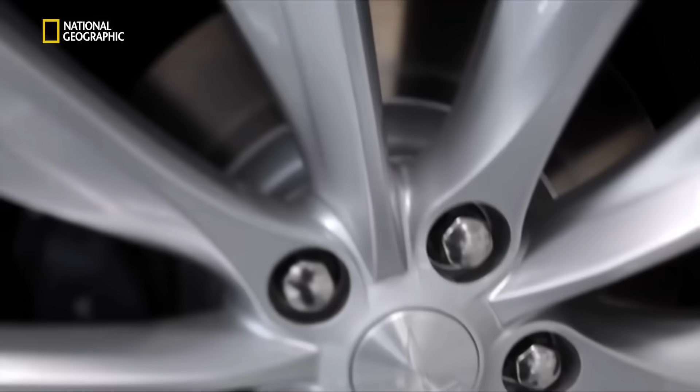Aluminium bodywork, 19-inch alloys, and a $50,000 price tag. At first glance, this car is the latest in a long line of high-end sedans. But that is where the similarities end.

The Model S is a totally different type of car. Tesla believe it can lead a revolution and change the face of motoring forever. It's the first ever mass-made premium sedan powered purely by electricity, designed to have speed and range, and not a drop of gas. Our goal is to create an electric car that is the best car in the world and show that that's what an electric car can be.

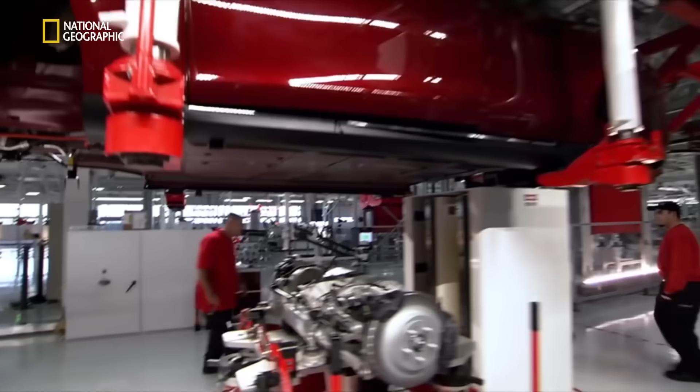Tesla's goal is to kill off the combustion engine and prove the electric car has finally come of age. Driving a gasoline car is going to feel like yesterday. Driving this car is driving the future.

This is Elon Musk, Tesla's co-founder and CEO. Elon is an inventor and a maverick entrepreneur, one of America's youngest billionaires. I like exploring, I like technology, I like creating things that have never been seen before or even imagined before.

He is a genuine Silicon Valley success story. In the mid-1990s, Elon set up a small internet company. By 2002, he'd sold PayPal for $1.5 billion. Next, he founded private rocket company SpaceX.

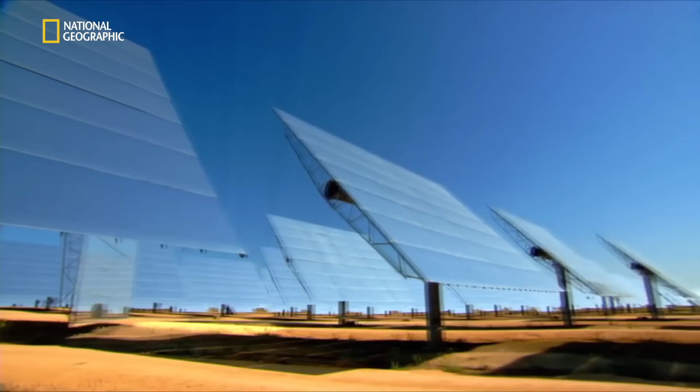It's all part of Elon's life mission. When I was in college, I tried to think about, well, what are the areas that would most affect the future of humanity? So the three things were the internet, making life multiplanetary, and the third being sustainable energy. So that's what really ties together my companies, is that sort of thought from 20 years ago.

Tesla Motors is Elon's sustainable energy brainchild. Named after electric power pioneer Nikola Tesla, it's a car company that only makes totally electric vehicles. No hybrid and no alternative fuels. Absolutely no tailpipe. The company estimates their electric cars cause 50% less CO2, even if much of the electricity comes from a coal-powered plant.

It's technology Elon and co-founder J.B. Straubel believe we need. We're solving problems for our children, our grandchildren. Oil is a finite resource, and eventually we have to find alternatives. When you take that oil out of the ground and you burn it, it's extremely dangerous. We should not play Russian roulette with the atmosphere.

We only got one. Tesla's founders have a vision of a world without gasoline cars. They are convinced electric is not only cleaner, but better. Now, they want to prove it to the world.

They believe their cars can trigger a transport revolution and bring electric motoring to the masses. What we're doing here at Tesla can have an amazing impact and revolutionize the auto industry and make every car on the road electric. That's our end goal.

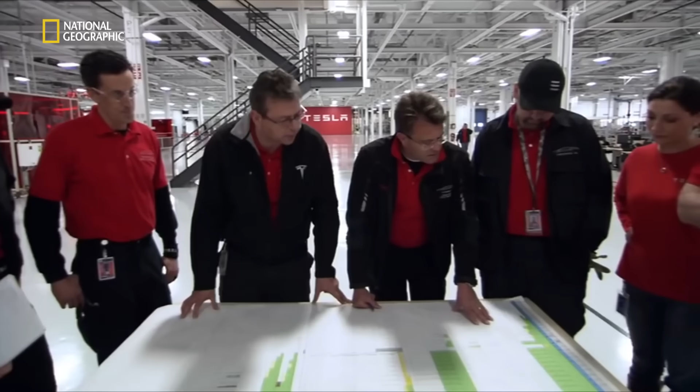Elon brings in Gilbert Passin as head of manufacturing. Gilbert is an expert from one of Toyota's award-winning plants in Canada. His description of my job to me was very simple: you've got to create the best factory in the world with the best people in the world and make the best premium car sedan. And I said, okay, so where's the factory? Well, you have to find one. Where's the team? Well, you have to make one.

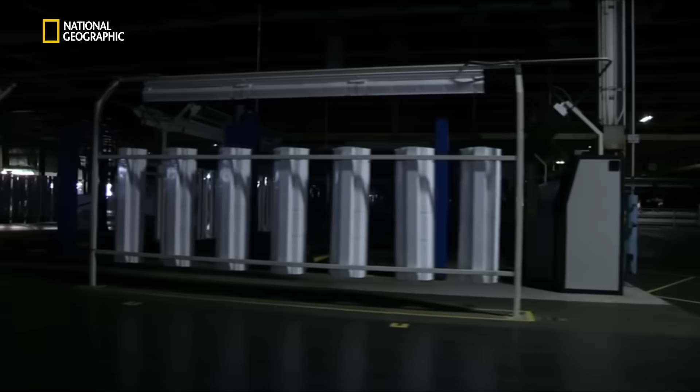The company purchased a former GM and Toyota site in Fremont, California, on the edge of Silicon Valley. The abandoned facility is a traditional car factory: dark, little natural light, bare concrete floors. When Tesla Motors move in, it's the birth of a megafactory like no other. It's a totally fresh approach to car manufacture.

The walls and floors are painted white, the machinery a striking red. Skylights and windows flood the factory with sunlight. If you make the factory pristine and clean, that sets the tone for the vehicle. We want that same sense of quality and precision in the car itself.

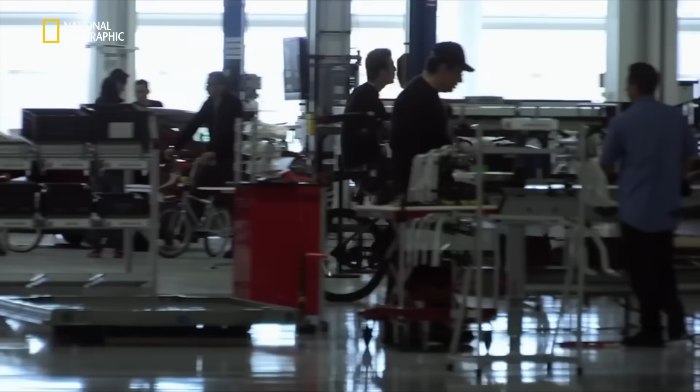As part of the whole company ethos, bikes are provided so the workers can get around the factory. I think it's important to have an environment where people look forward to coming to work, so it's worth putting some effort into making the factory beautiful.

In true Silicon Valley style, they fill the space with the most advanced technology, creating an automated production line capable of building tens of thousands of cars—super efficient multitasking robots, self-guided smart carts, and computerized production schedulers.

The factory is designed to be up there with the very best in the world. We love engineering, we love beautiful machines, we love new technology. We love to innovate with high technology, and also in manufacturing, we love to do that.

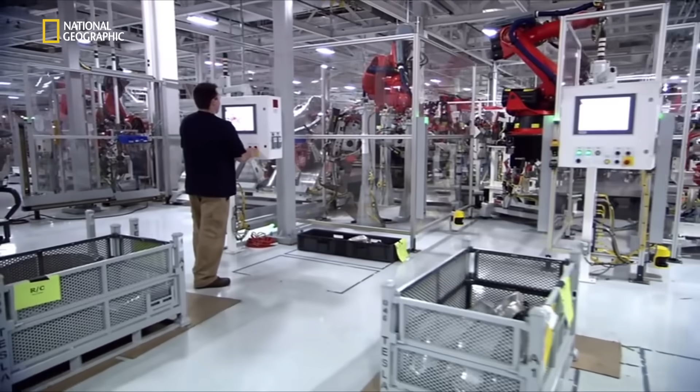Without training, these sophisticated robots are useless. They all need to be taught before they can run tasks automatically. Every robot is programmed by hand. The Tesla team has meticulously trained 130 sophisticated robots over a year and a half.

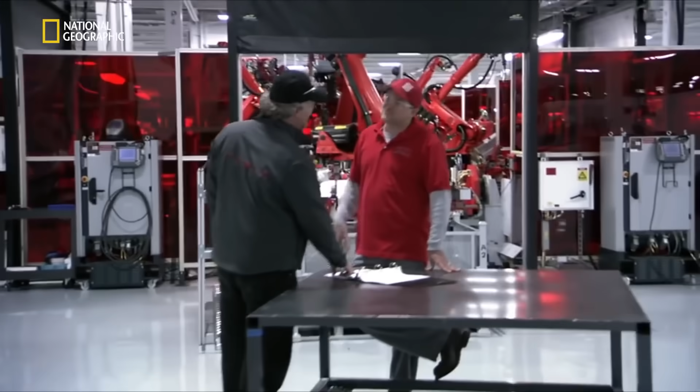One of the last robots still to be programmed is a MIG welding robot. It will be used to join the car's underbody. These are pretty busy robots, so we got to make sure that our takt time is good.

A robot's work is only as good as the man who trains it. Brad Johnson is a welder with over 25 years' experience at the highest level. Getting this done today, we'll have the teachings all nice and smooth, and then we can start running 100% full automatic. That sounds good.

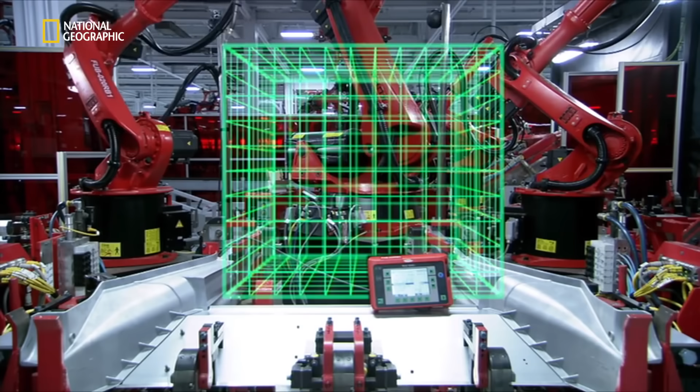The space in which the robot operates is treated as a three-dimensional grid. The head can be manually guided to any point using a teach pendant. There's our start point and our weld position.

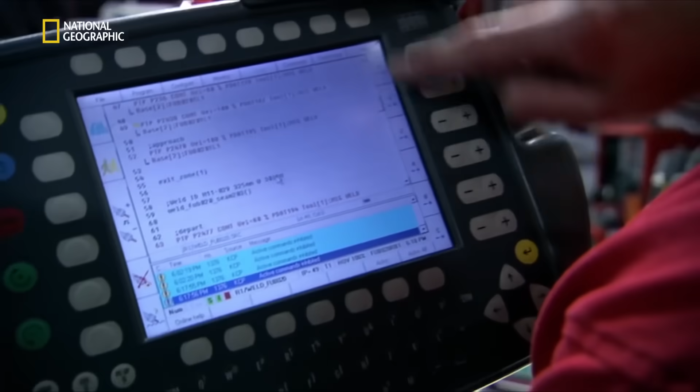Brad guides the robot millimeter by millimeter and uploads the coordinates. The robot works out the most efficient route and runs the program.

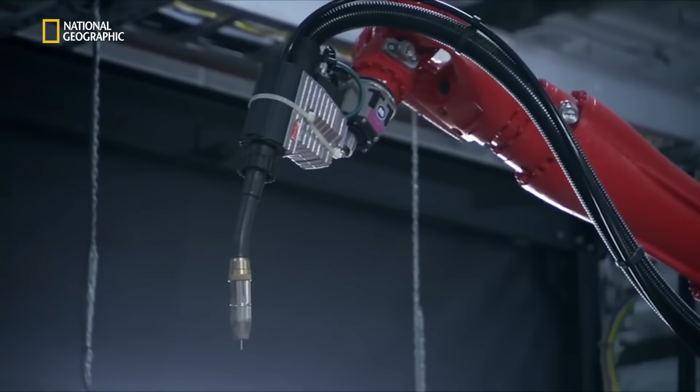Looks like the teaching is right on mark, and we have a really good quality weld right here, so we should be able to run full auto with this weld. When full production begins, Brad's handiwork will be exactly replicated by the robot 100 times a day.

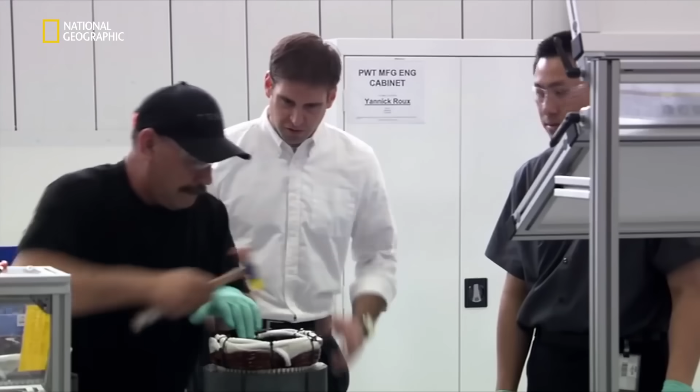Since their inception in 2003, Tesla Motors have been pursuing their electric car revolution with a step-by-step strategy. In an unconventional business move, Elon decreed that Tesla must invest in their reputation first and worry about profit later.

Stage 1: make a small number of high-value cars that prove electric power can be desirable. The Tesla master plan is very simple—we start off creating an expensive, low-volume car to help break the mold in electric vehicles.

Plan in place, they set to work on their first car, basing it around the British-built Lotus Elise. Five years later, they released the Tesla Roadster. Quicker off the blocks than an Aston Martin Vantage, the electric sports car astonishes the motoring world. Step 1 complete in the Tesla strategy.

What we showed was that an electric car could be sexy, it could be fast, and it could be long range, and that if you produce such a car, people would buy it. But as a $100,000 two-seat sports car, it's a luxury second vehicle to most of its owners.

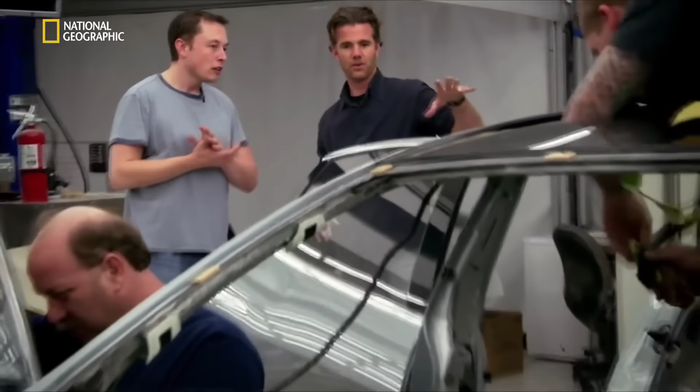Time for the pivotal Stage 2 in the master plan: a car that costs half as much and sells in much bigger numbers. A very important step in the Tesla strategy is really going to show that a mainstream electric car can be better than a gasoline car.

The Model S is the second step in Elon Musk's vision of an electric revolution—a premium mass-market sedan designed and built from the ground up by Tesla.

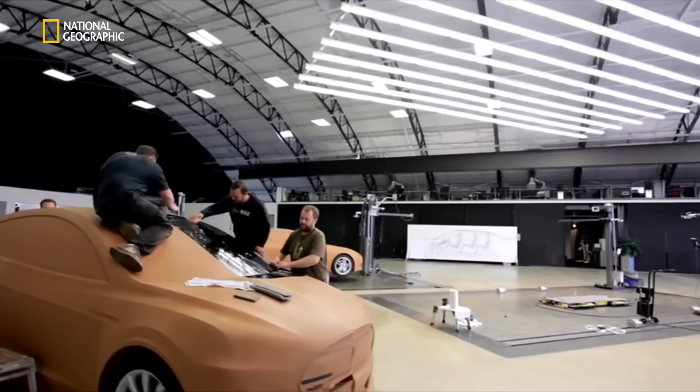At the studio in Los Angeles, they are working to craft that car. The Model S is really the foundation of Tesla. It's the first true product designed, engineered, built, manufactured by Tesla, and it's really the beginning of what our mission is about.

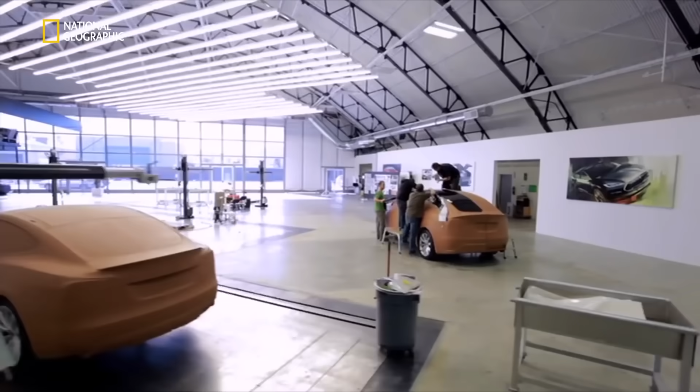Franz von Holzhausen is the chief designer. He believes Tesla's design needs to have some conventional appeal. It's really easy to have a clean slate and go pretty crazy with that. We had to start with something that people could relate to—if they even knew or cared that it was an electric vehicle, they were attracted to it.

We've stretched the sedan and made it a little bit more modern, but it's still a sedan. It still has this somewhat traditional cue, so it's easy to love because of that association.

Although uniform in appearance, the Model S is a unique car. It was conceived as electric. Even the shape is designed to maximize the battery's range. The body and the waist are all slim, so there's no excess fat or body mass on this car, and that translates into great efficiency.

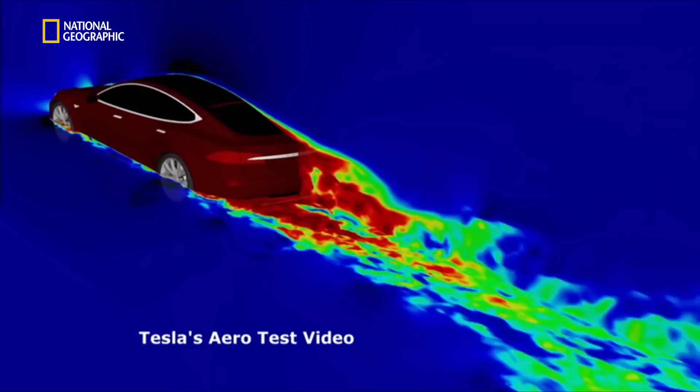This car is one of the most aerodynamic sedans on the market. In an electric car, conserving battery power is so important, the designers put huge efforts into reducing the drag. Even the door handles are aerodynamic, receding flush into the body.

But it's the interior that is most heavily influenced by the electric powertrain. The powertrain is incredibly small. You get the same performance out of a motor that's the size of a watermelon, fitting between the rear wheels, and everything else above that is what I call the opportunity space.

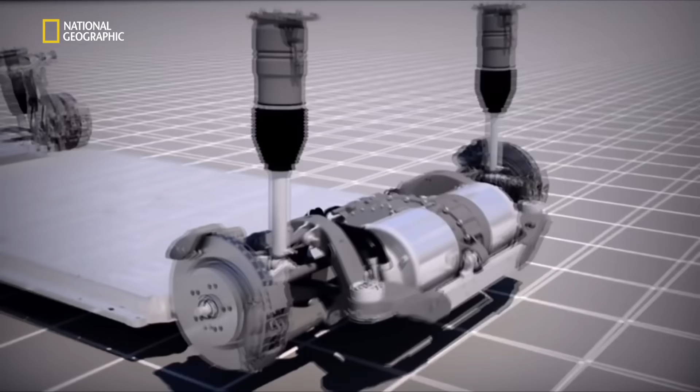The design team started with the motor and flat battery pack and worked upwards. With the motor next to the wheels, there's no need for a drive shaft, so there's no rise under the rear middle seat. There's no fuel tank or transmission. The Model S has free space from the floor upwards.

What you'll see is a vast amount of space. In fact, it's so big that we decided we could fit 7 people, by putting 2 rear-facing child seats in the back here. You can see where they fit, and their legs go right down in there.

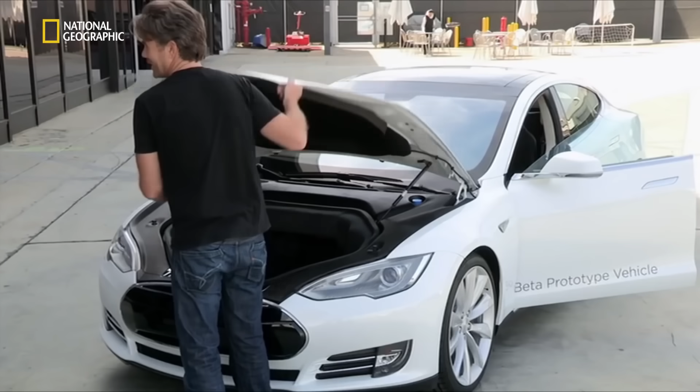So this is what we call the frunk, really the trunk in the front of the car. Arguably, you can put a whole bunch of stuff in here, even when the back of the car is totally loaded up with people and kids and stuff. And who doesn't need one of these?

Tesla promote these unique features at every opportunity. As a new marque, they're trying to make an impact in a marketplace crowded with established big hitters. Just looking at the United States, of the 3 other car companies, the youngest is 90 years old. So clearly this is not an industry that has been supportive of newcomers.

The Geneva Motor Show 2012, another leg in the company's relentless promotional campaign. We're done selling Roadsters in North America, so this is our product. It's our product, Tesla's product, and therefore we need to get it out to start selling.

Industry experts are judging Tesla on the Model S. It's seen as make or break. Maybe Tesla has a bright future. I think the Model S is very decisive to see if there will be a great future or if there won't be a future at all.

The company have taken the risk of collecting prepaid orders on the car. They've amassed nearly 10,000 advance sales. The financial boost also creates real pressure. I get harassed quite a bit actually by some people who have reservations, and it's a lot of expectations, very high expectations that we're going to have to meet and exceed, really.

Some prepaid customers have been waiting up to 3 years for their car. In return, they've been promised a delivery deadline. I do feel an incredibly strong obligation to those that have placed their faith in Tesla and put down deposits. I'll do anything to make sure that their faith is not misplaced.

The delivery deadline for the first cars is now only 2 months away, but the brand new factory hasn't built a production car yet. If the customers are to get their Model S on time, the facility urgently needs to start manufacturing. The speed at which we have to work here is extremely important to the company's bottom line. This is a kind of timing that is really, really challenging on many, many different accounts.

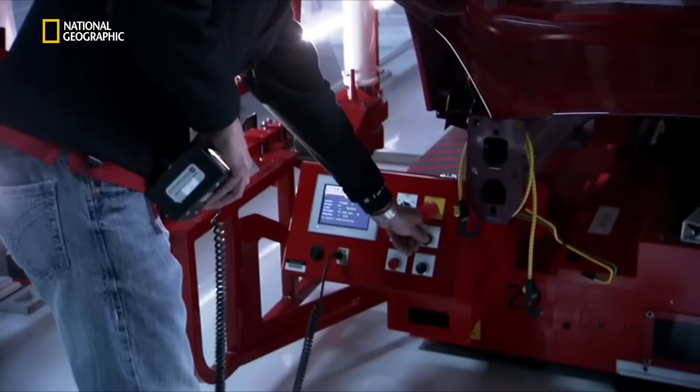Tesla need to build 20,000 cars a year. But before mass production can begin, Gilbert and his team must prove the factory is ready. The company is relying on them to get it right. We have to make sure that car after car, the quality is there, everything is perfect along the way. So we are really gearing up towards a production ramp-up.

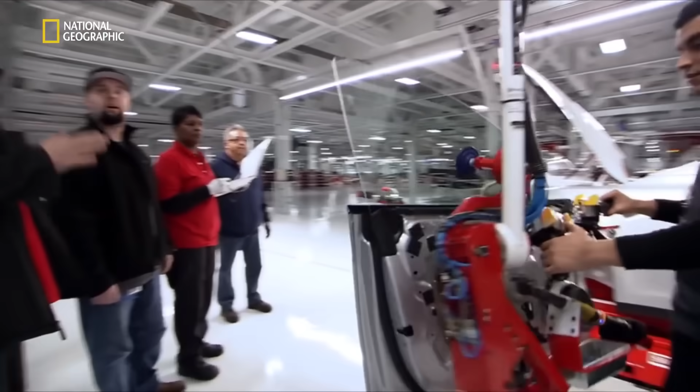Over the next few weeks, the factory will test manufacture a limited number of Model S. If the line doesn't perform with these cars, the company will be forced to miss their deadline. Tesla's electric revolution would be over before it started.

A very, very important moment is the birth of Model S in our Tesla factory, and it's where the rubber is going to meet the road, so to speak. The process begins in stamping. To increase the battery's range, the company have decided to build 97% of the Model S with lightweight aluminium. It's an extremely rare feature in a mass production car due to the cost.

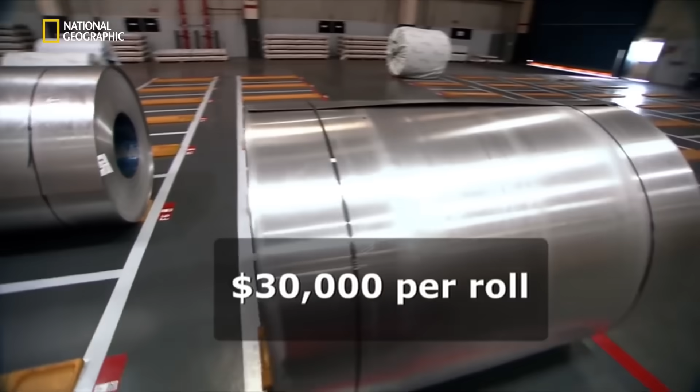Every Model S starts as one of these. The roll is loaded into the mechanical cutting machine.

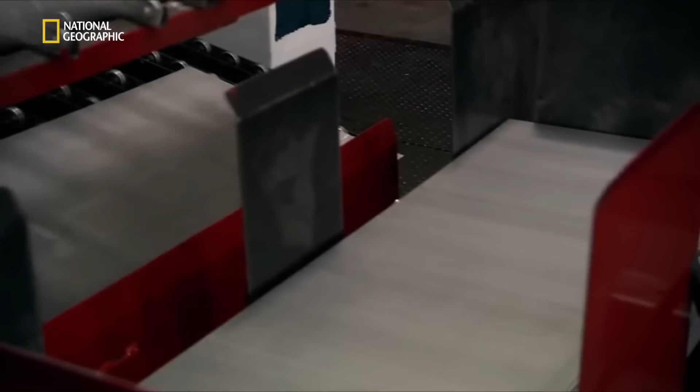Once cut, the panels are passed to the stamping press. We need to translate flat pieces of aluminum into 3D forms. How to do this with aluminum stamping, with the level of quality we expect, is really, really challenging.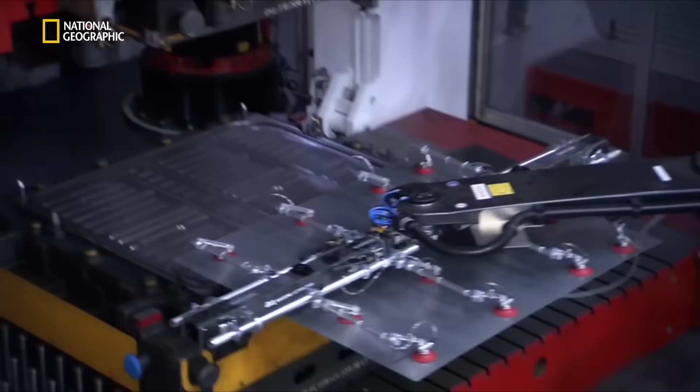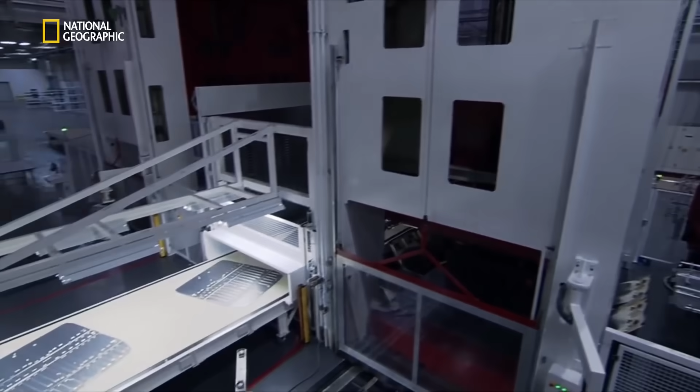Robotic arms feed the 4 stamps. Each stage forces a more detailed 3D shape, producing stacks of floor plates.

These lightweight aluminum parts improve the Model S's power-to-weight ratio, which helps increase the performance and range.

The 2 things that obsess co-founder and technical chief JB Straubel: Any ideas on how we can make it better? Performance and range were the 2 big issues that needed to be improved, and that's where we've put most of our focus on the technology and powertrain.

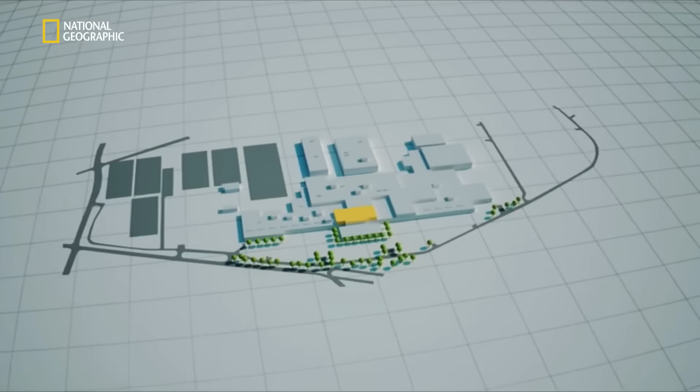Powertrain manufacture, 2nd floor. This is where they build the heart of the Model S, the motors and battery packs. Tesla know the electric powertrain will define their cars, so they push to advance the technology themselves. This is an extremely exciting field where inventions continue to happen even faster than they did in the years previous.

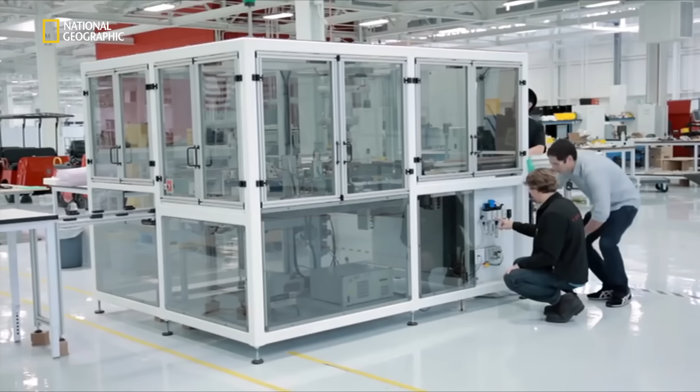Tesla's solution to improving battery life appears startlingly simple. They use thousands of small lithium-ion cells, similar to laptop batteries. Thanks to these regular batteries, the company say the Model S has achieved a top range of 480 kilometers.

Once you have 250 to 300 miles of range, then you're in a different usage mode. You're in a range that is equivalent to most gasoline cars.

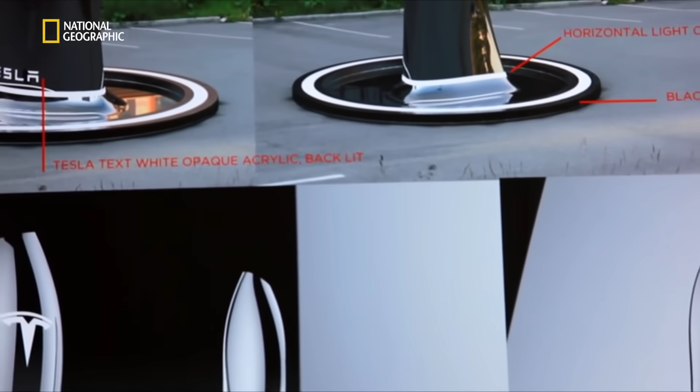The car can be charged by 100 kilometers every hour from a regular power outlet. Ultimately, Tesla are hoping to install superchargers along major highways that can charge the car to capacity in 45 minutes. You can charge the car up every night, but you don't need to. You can actually charge it once a week.

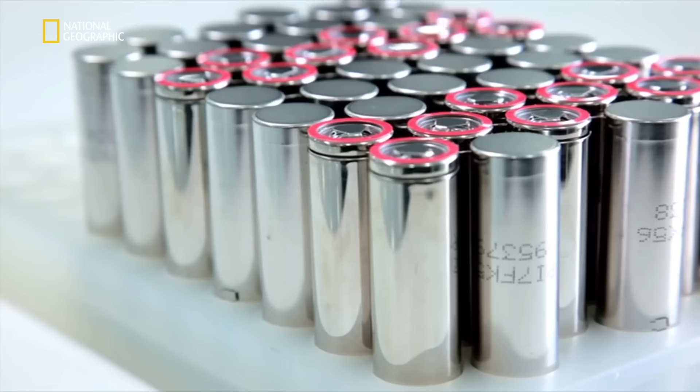The high-performance battery pack is formed with over 7,000 small cells. They're organized into a flat layer with specific groupings of positive and negative. The final layout is the key to the pack's power and range, and Tesla considers it absolutely top secret.

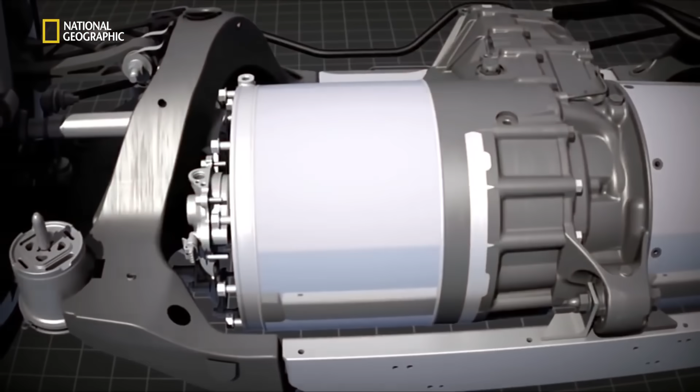The motor unit is also developed in-house. It's essentially an AC induction motor, a concept invented by 19th century scientist and Tesla Motors namesake, Nikola Tesla. He harnessed an electromagnetic field to turn a basic motor. Modern-day Tesla has developed their motor with a highly conductive copper cylinder. When the electromagnetic casing is fed with current, the copper cylinder inside starts to spin.

It's nearly 3 times more efficient than a combustion engine. In fact, there are only 3 moving parts. It connects directly to the rear wheels and doesn't need a transmission. These are the 3 moving parts in the whole Model S powertrain.

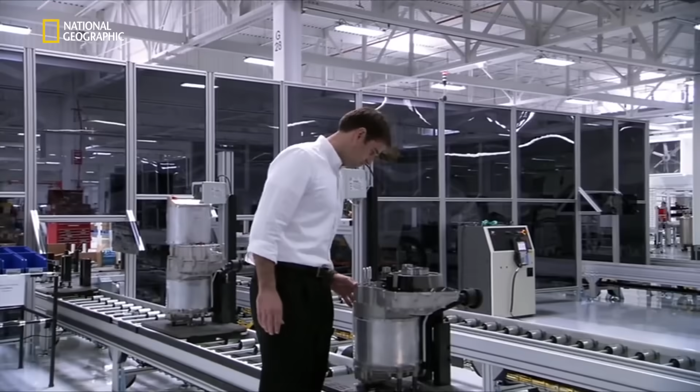One of the cool things also with this very simple gearbox is that when we want to go in reverse in the car and back up, all we have to do is spin the motor in the other direction, and the car backs up. We don't need a clutch, we don't need a separate gear for reverse. The entire drive unit is under a meter long, smaller than a golf bag.

But it propels the Model S, a family-size sedan, into the class of performance cars. In fact, this powertrain creates a totally different driving experience.

Program Director Jerome Guillen works constantly to refine it. As with the light switch, electric power can be fully applied instantly. The first thing that's gonna surprise people is how much torque you get so quickly. That instant response—you cannot really mess with the throttle too much, because if you push on it, then the car will go.

Even from a stop, you have a very quick takeoff, because basically the torque is instant. If I stop here and then start, you'll see we have acceleration right from the beginning. At any speed, you have that same torque available. So it's very easy to pass a car or get out of harm's way if needed. Unlike gasoline cars, which have to change gears, the Model S can accelerate to top speed totally uninterrupted.

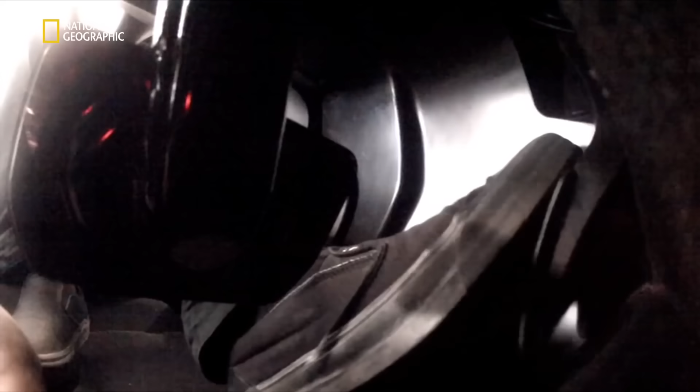But the real evolution in the way you drive comes down to one of the central innovations in electric cars: regenerative braking. Although the Model S has traditional brakes, you don't have to use them. Regen braking can be engaged by simply easing off on the accelerator. When you want to brake, you just take your foot off the pedal, like I'm doing now, and the car brakes itself, so you don't need to use the mechanical brakes. When active, the regen system magnetically resists the motor's rotation, slowing the car and harvesting electric current. The energy recovered recharges the battery and extends the range of the car. When you put your foot down again, the electric power returns.

Tesla call it one-pedal driving. It's a little bit different approach, but once you realize that if you take your foot off the pedal, the car slows down, it's like, whoa, this is great. I can drive using only one pedal.

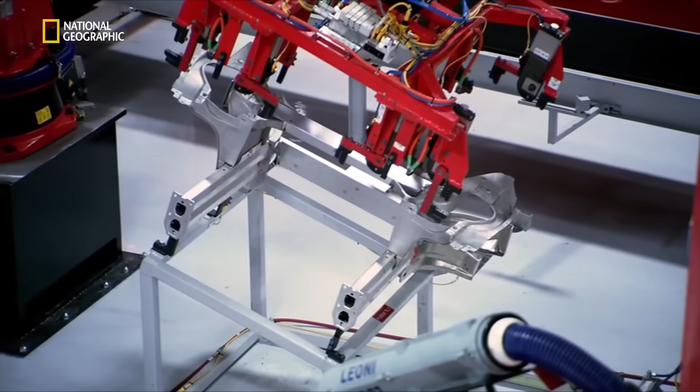In the factory, the delivery deadline is fast approaching. The Model S test production cycle reaches the main assembly area. The car is based around a all-aluminum underbody. To make it, engineers weld struts and casts into a framework. Brad's newly trained welding robot is about to be tested in full automation. They have trained the robots with prototype parts. Now, with final components coming through successfully from stamping, it's automated production for real.

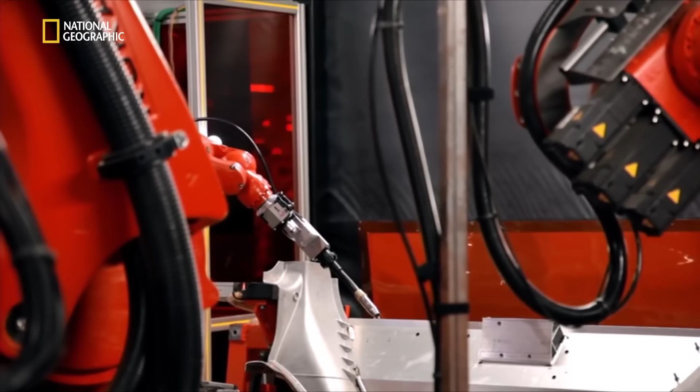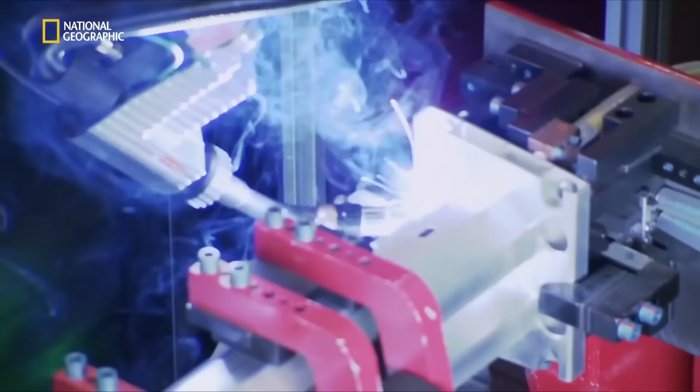Under observation, it's a tense time for the team. The robots work in a tightly coordinated chain. The second phase hits an issue. It shuts the whole process down.

With the deadline looming, Elon Musk is determined to keep Tesla's waiting customers happy. He's organized a Model S test drive event for people who've placed deposits. The test ride will go out onto Jack Northrop Boulevard, so you'll get a chance to see that this isn't some show car that doesn't actually do what it says. It will go fast, with a lot of people in it. And quiet. And quietly, yeah.

Many have prepaid years ago, and it's their first time inside a drivable Model S. Customer and board member Steve Jurvetson captures his experience on his mobile phone: Wow, this is insanely cool. It's a surreal scene. It's way cooler than I can imagine. You really decked this out. Yeah, it's nice. The first ride has to be documented here.

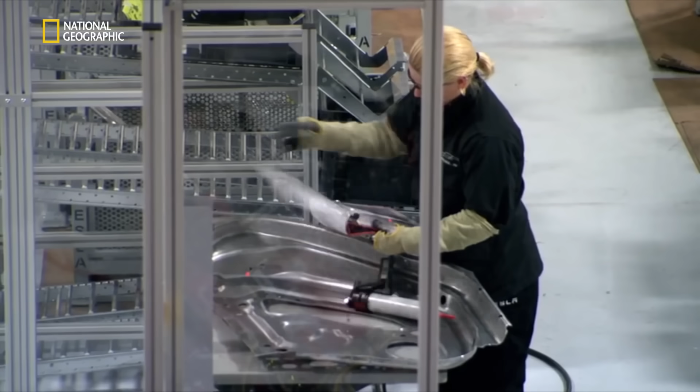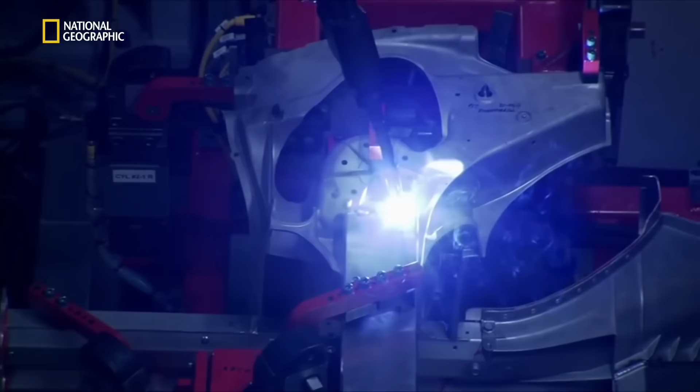They adjust the settings and set the robots in motion again. This time, it goes off without a hitch. To the team's relief, the process can be approved for mass production.

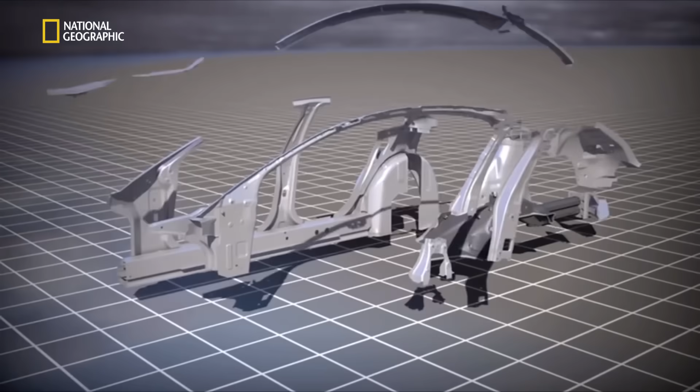The run through the automated line reaches the Model S exterior. The Model S body is made up of 14 different sections. To speed the workflow, Tesla construct each section at separate sub-assemblies, including the door sub-assembly, where the internal frame is joined to the exterior panel.

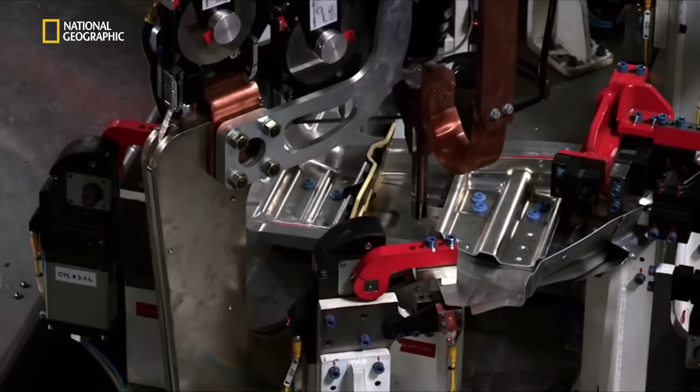As the robot's pincers come together, they fire a rivet and join the aluminium sheets. Over to the right, side body sub-assembly. One of the most advanced aspects of Tesla's robots is that each arm can perform a variety of different tasks. We have to use the whole gamut of technology to make the aluminum body between stamping, welding, riveting and bonding, all using robots that are multitasking.

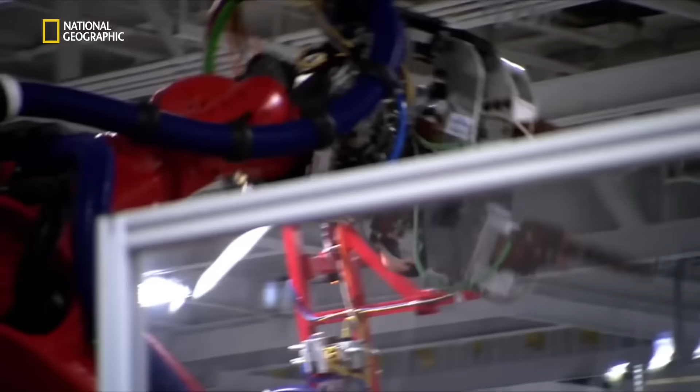This flexibility is essential for a compact and efficient workflow. A robot can spot weld using a pincer tool, then automatically detach the pincer and pick up a clamp tool. The same arm that joined the panels can now move it to the next station. It's clever, but tricky, and needs constant refining. When you draw something yourself, you take a pencil, then an eraser with the same hand, right? And then you change the tool, so to speak. Same thing here.

Once assembled, the sections are brought together at body assembly, where they're riveted around the welded underbody to form the basic shell of the car.

All the sections are lined up alongside the central framing line. Gradually, the automated line builds up the side sections, ready to house the doors.

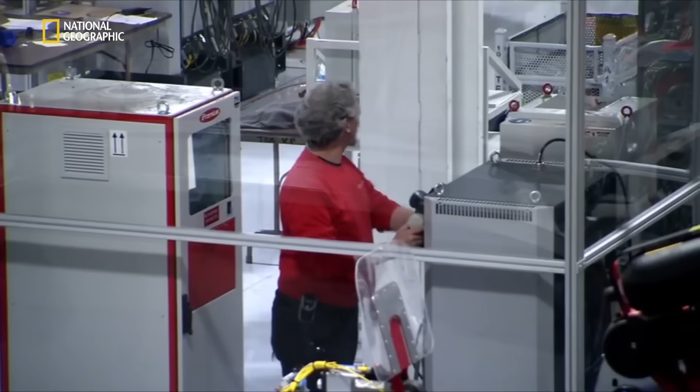A test batch of 3 cars is complete. Body assembly has demonstrated it can run successfully in full automation. It's a vital milestone in the countdown to mass production.

Completely assembled, the aluminium body is now known as body in white. It's ready for some color. The body in white is loaded onto an overhead train that carries it to the paint area.

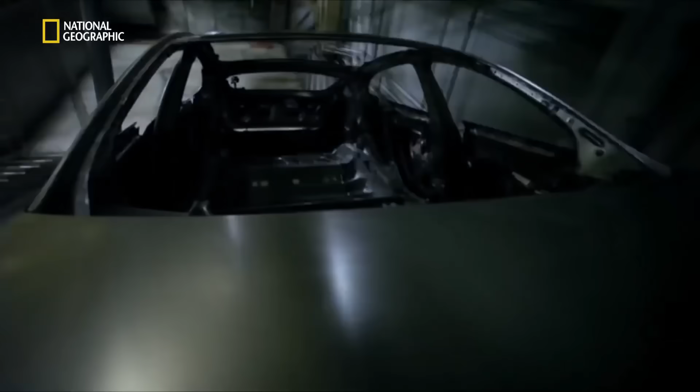At this vast facility, the paint center is in a totally separate building. The Fremont site covers nearly 95 football fields of space. It's so big, the Model S production line only fills 20% of it.

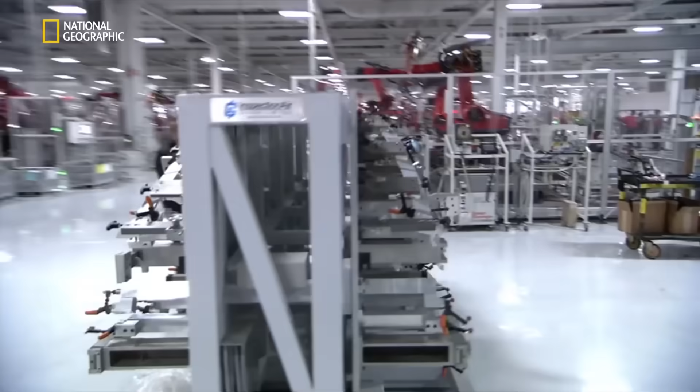For Gilbert Passin, the extra space is the cornerstone of Tesla's grand strategy for an electric revolution.

The Tesla factory is huge. It's about 5 million square feet on 2 levels. Right now, we are only utilizing a small fraction of the space, but most of it, as you can see behind me, is what we call the dark side. It's sort of dark and not utilized yet, even though we have a lot of plans for the future on how to fully utilize this entire building.

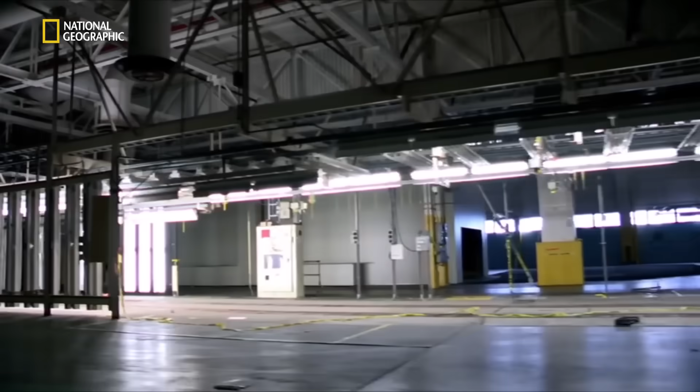These expanses are an integral part of the company's stage-by-stage building plan. They want to fill the space with a production line for a further range of Tesla vehicles - a very high-volume, economy-priced model, the Stage 3 car.

In the future, we intend to expand our range of vehicles, maybe of a smaller size and also more affordable for the market. And this factory is ideal, and we are going to make this a super mega factory.

Long term, Fremont is meant to produce the low-cost Stage 3 electric car in the millions. It's the final step in Elon Musk's Tesla master plan.

To really have widespread adoption of electric cars, we have our 3rd generation vehicle, which would be a low-price, high-volume vehicle, and that's really what's going to fill out the rest of this humongous factory. I'd love to bring this to 500,000 vehicles a year as soon as we can.

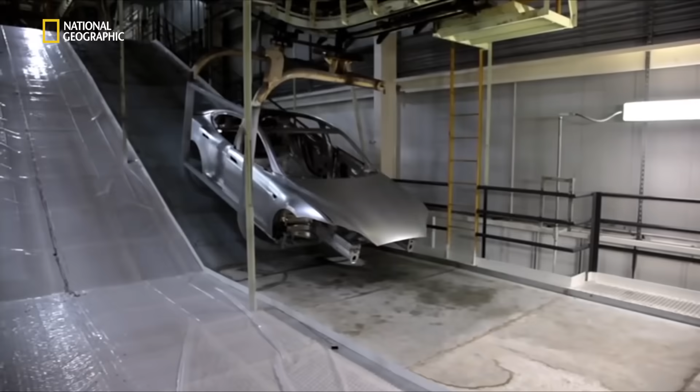The future of Elon's strategy first depends on the success of the Model S. In production, the time to the delivery deadline is now running low. The aluminium body arrives on the overhead train from Body Center.

Paint Center. This is where they make the car look like a premium sedan. It's a state-of-the-art process. There's a lot of technology that goes into the Tesla car, but the very first thing they'll tell you is what color of Tesla car they bought. That's how important the paint is.

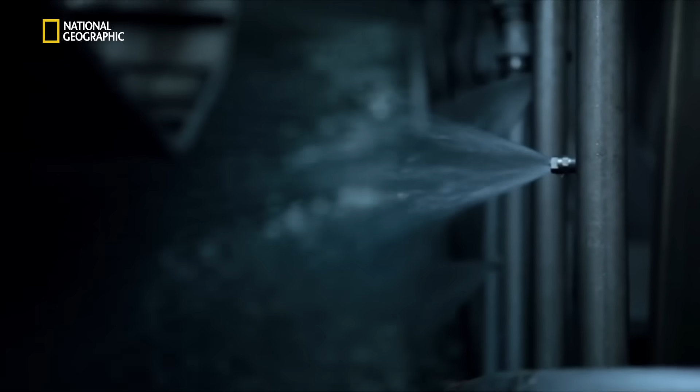First, a roller coaster ride of treatment baths - detergent to clean the surface, and then electrocoating. The electrocoat helps attract the paint to the aluminium.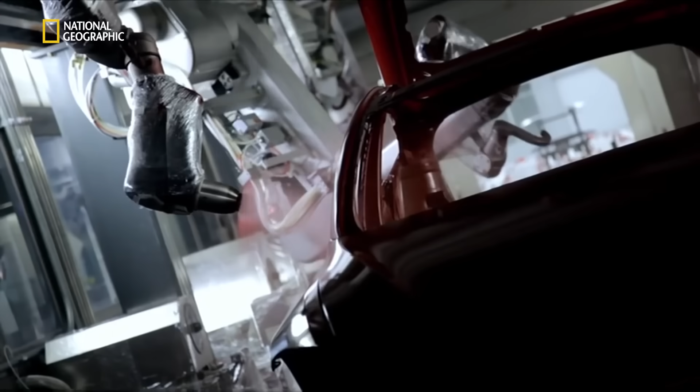This man has a vision to create the best electric cars ever seen and consign gasoline to history. This is something truly revolutionary. He wants to build his unprecedented Tesla car in a futuristic new factory and trigger an electric transport revolution. It's been a long time since something like that happened in the car business, but it's here. It's a dream many have had, but none have realized.

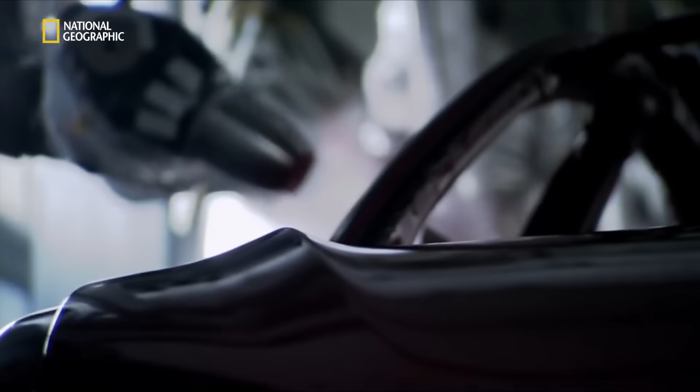Aluminium bodywork, 19-inch alloys, and a $50,000 price tag. At first glance, this car is the latest in a long line of high-end sedans. But that is where the similarities end.

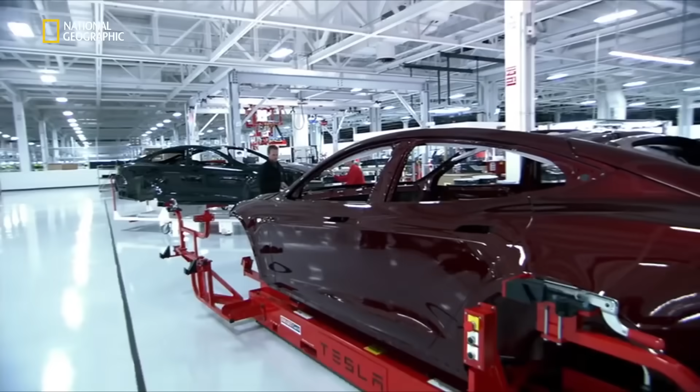The Model S is a totally different type of car. Tesla believe it can lead a revolution and change the face of motoring forever.

It's the first ever mass-made premium sedan powered purely by electricity. Designed to have speed and range, and not a drop of gas. Our goal is to create an electric car that is the best car in the world and show that that's what an electric car can be.

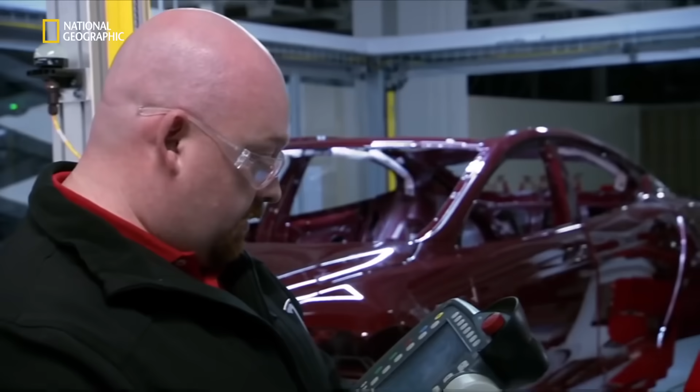Tesla's goal is to kill off the combustion engine and prove the electric car has finally come of age. Driving a gasoline car is going to feel like yesterday. Driving this car is driving the future.

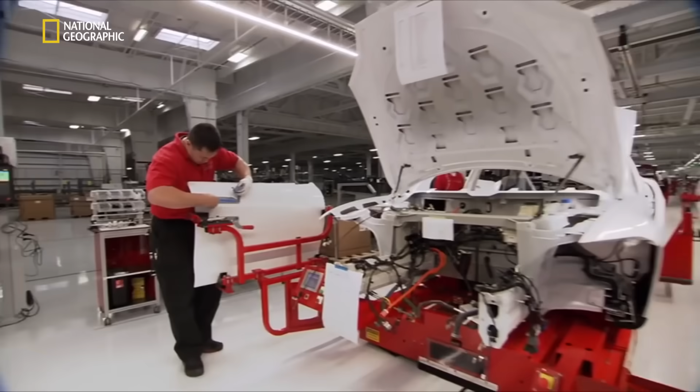This is Elon Musk, Tesla's co-founder and CEO. Elon is an inventor and a maverick entrepreneur, one of America's youngest billionaires. I like exploring, I like technology, I like creating things that have never been seen before or even imagined before.

Proof the car is a product of the tech-savvy US West Coast. The Model S carries a touchscreen tablet inspired by Tesla's Silicon Valley neighbors. Tesla is very much a Silicon Valley company that has a Silicon Valley operating system, which is similar to a Google or Facebook or Apple, joined together with a tremendous amount of great automotive expertise.

It's about bringing the things that we're used to, our phones, our computers, and the interaction that we have with them into the car.

The car has a mobile 3G internet connection. The driver can download software upgrades and customize the display. The car's always connected to the internet, so we can understand your day book, and we can know that you're going to work at 8 a.m. on Monday, and the car can be warmed up for that experience.

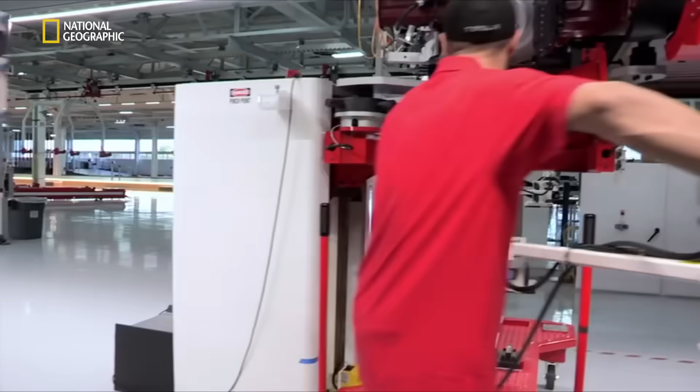At the factory, the start date for mass production is now only two weeks away. The first batch of test vehicles reaches the vital final stages: powertrain and body marriage.

In gasoline cars, installing the drivetrain is a lengthy process. With electric, it can happen in just two steps. Step one: the motor unit, complete with suspension and brakes, is bolted into the rear wheel berths. There is no drive shaft or transmission to be attached. In one motion, it's fitted.

For final assembly, the work is mainly manual. Like the robots, the line workers' performance is being monitored. 509, guys.

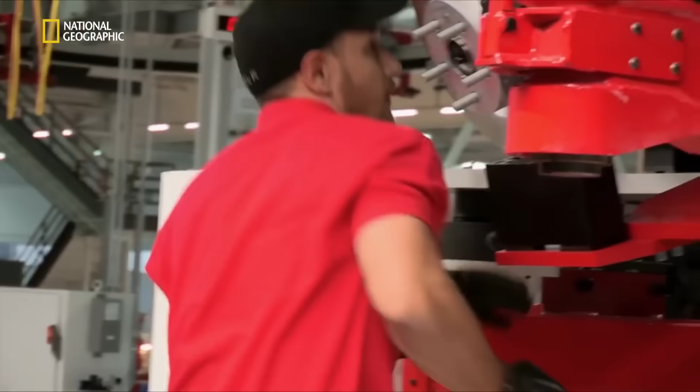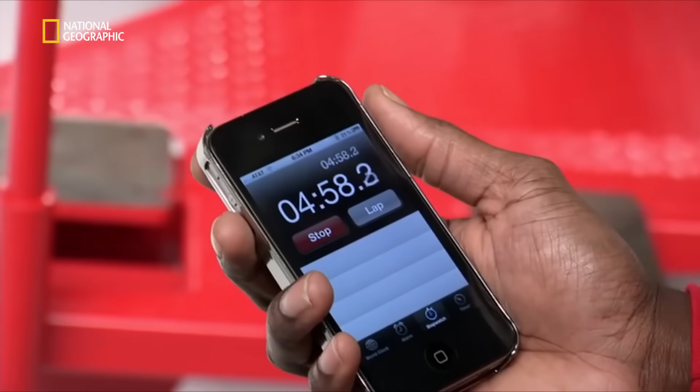Battery pack installation. The pack's steel case acts as the car's chassis. Bolted into place, it gives the Model S its rigidity.

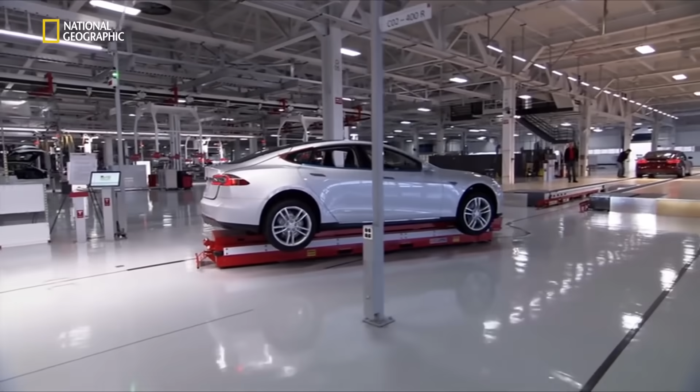A stage along, the first complete cars arrive at final inspection. At Elon's insistence, inspection happens on a bamboo platform. He believes you can only judge a car's beauty if it's framed by beautiful surroundings.

The last check is the test drive. At Tesla, the track is very different. Because electric cars produce no exhaust fumes, they can be driven indoors.

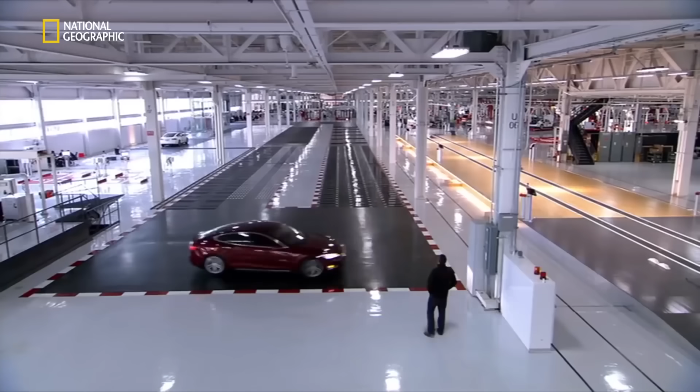Our people have done so well at putting this car together. You can see the remarkable quality of the paint and the entire vehicle, the body fit and everything. I'm so proud today.

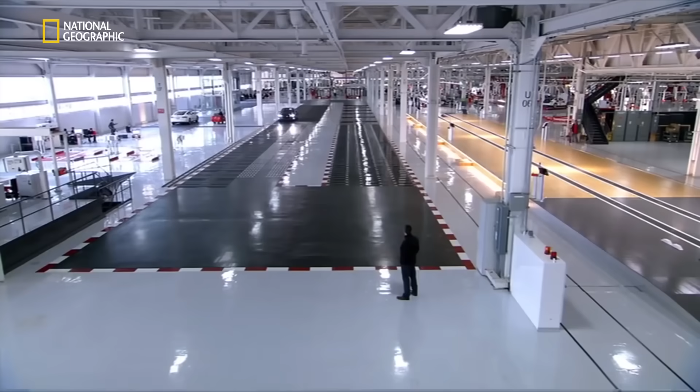This is the first Model S to pass through the production test run, and its quality proves the new megafactory is ready for mass production. It's a big moment for the company. Just to see this car going around the test track here, it really demonstrates the fact that the Tesla factory is ready to go. I just have to make 20,000 per year, more of this kind, and it's sort of a done deal. We just have to get it done.

The factory can now push towards the delivery deadline, allowing Tesla to pursue their strategy for an electric car revolution. Can you imagine if all the cars in the world were able to have zero emission, zero noise, and we could do that in a perfectly clean environment? That would be so cool.

This is Tesla's vision of an all-electric future. No fumes or heat, no noise or dirt, no expensive gasoline. Just clean and quiet streets.

It's truly impressive to see how we are, day by day and person by person, changing people's thinking about what electric vehicles are versus what we've all grown up and taken for granted. If we can do that through one product, that's unbelievable.